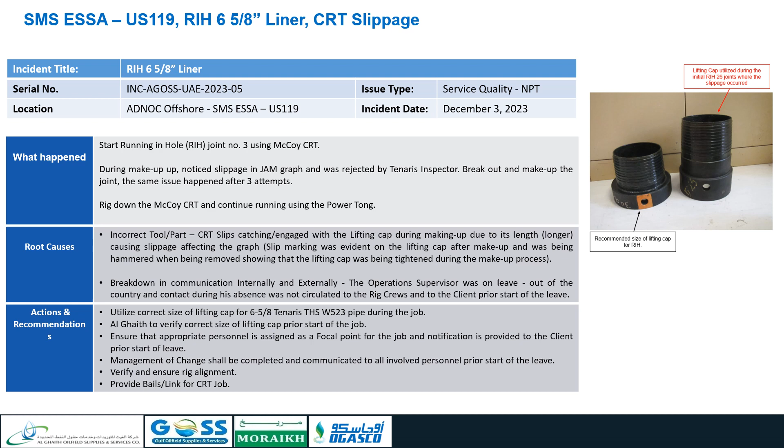prior start of leave. Management of change shall be completed and communicated to all involved personnel prior start of the leave. Verify and ensure rig alignment. Provide bails, link for CRT job.

Incident regarding cementing batch mixer exhaust insulation burned. Happened on November 29, 2023 at 2300 hours, at AD 113 well BB 1783. Incident description. After mixing cement slurry in batch mixer, smoke was observed on the engine area. Team on location stopped the batch mixer and proceeded to extinguish the possible fire.

Initial findings. Exhaust system insulation cover was burned and caused smoke. No signs of fire in the equipment other than smoke in the insulation cover. No flames were observed during the incident. Immediate action was taken by personnel in location to remove the insulation and cool it down to remove the risk of fire. No personnel injuries nor equipment damage.

Equipment is 1 year in operation. Immediate actions taken and recommendations. Stop work was applied. Insulation material specifications to be reevaluated. PM practices to be reviewed with maintenance team.

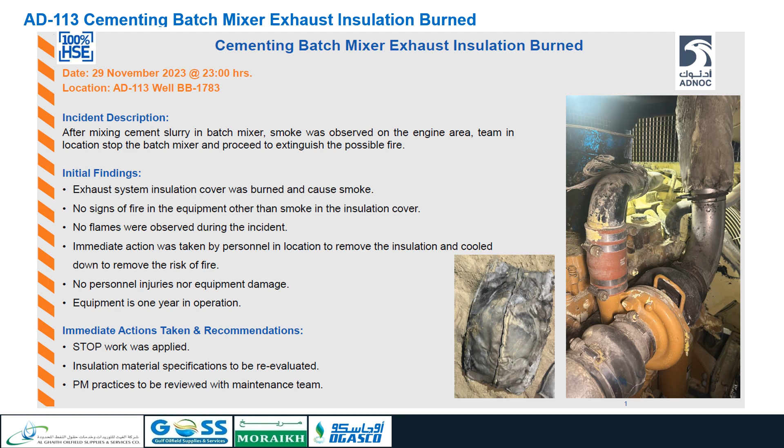Incident regarding injury while pulling belt tong. Happened on November 2023. What happened? While cleaning the dies on the belt tong, a floorman used the air tugger to pick up the belt tong when it got stuck on the iron roughneck track. The belt tong hanger arm bolts sheared and caused the hanger arm to contact the tong operator on the forehead.

Why did it happen? Inadequate job preparation by rig crew. Rig floor was overcrowded, which created poor visibility for the tugger operator. Tugger operator is not certified. Poor hazard identification by the rig crew. Stop work authority, SWA, was not implemented to stop the hazards.

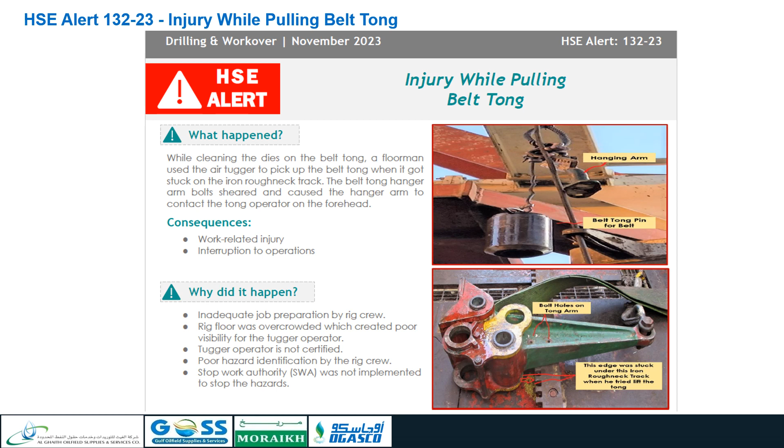What should be done to prevent reoccurrence? Ensure proper job preparation and discuss combined JSA with third party prior starting any work. Rig to limit the access to the rig floor to avoid overcrowding. Only certified and competent employees to operate air tugger. Conduct hazard identification refresher training to rig personnel. Reinforce the SWA among rig crew.

Areas where improvement is needed. Workers must always maintain awareness of the surroundings. Understand line of fire and follow precautions associated with hazardous objects, equipment, substances, and other conditions. Work supervisors must confirm that the site is properly lit and that all required PPE is being worn. Confirm that all hazards are identified and controlled.

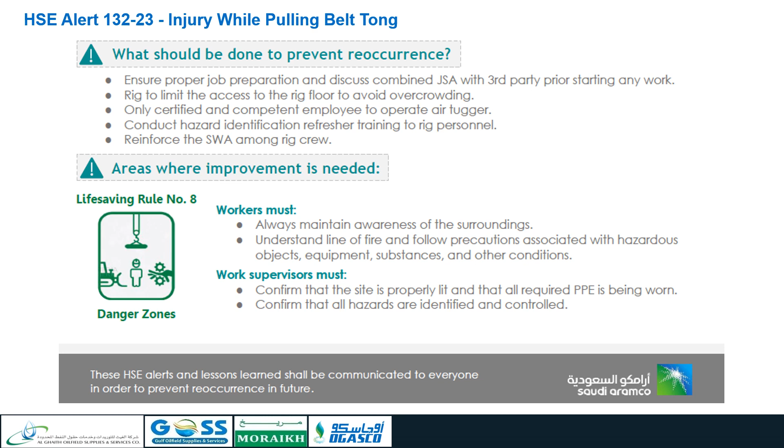Incident regarding struck by casing. Happened on November 2023. What happened? The operation was running in hole with 24 casing. While lowering the joint by crane, the joint swung toward the rotary table and struck IP's leg. Consequences: work-related injury. Interruption to operations.

Why did it happen? Failure to recognize the hazards. Simultaneous operations on rig floor. Stop work authority, SWA, was not exercised. Lack of supervision.

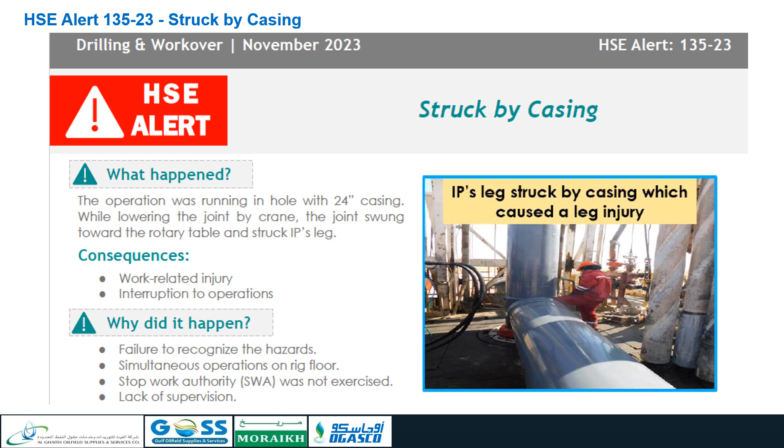What should be done to prevent reoccurrence? Position of crews shall be established and hazards shall be discussed during pre-task JSA/meeting. Avoid performing simultaneous operations on the rig floor. Emphasize SWA among rig crews. Work supervisors shall be present on all critical tasks.

Areas where improvement is needed. Workers must understand lines of fire and follow precautions associated with hazardous objects. Work supervisors must confirm that all hazards are identified and controlled.

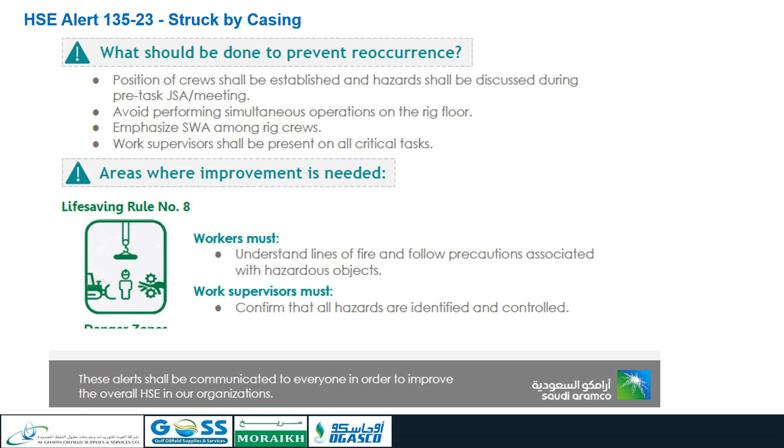Incident regarding finger pinched between pipe spinner and iron roughneck. Happened on November 2023. What happened? During housekeeping on rig floor, first floorman, IP, was moving the iron roughneck to the parking position, while second floorman was holding back the pipe spinner to avoid collision with the iron roughneck. While doing so, the second floorman unintentionally released the pipe spinner, which swung and contacted the iron roughneck and pinched IP's finger. Consequences: work-related injury.

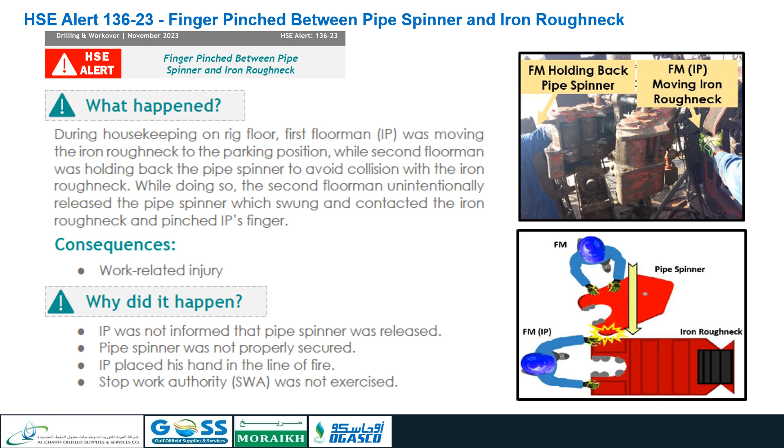Why did it happen? IP was not informed that pipe spinner was released. Pipe spinner was not properly secured. IP placed his hand in the line of fire. Stop work authority, SWA, was not exercised.

What should be done to prevent reoccurrence? Maintain proper communication during all tasks. Properly secure the pipe spinner in a stationary position with its securing sling. Provide safety awareness refresher sessions for line of fire and pinch point hazards. Exercise SWA. Areas where improvement is needed.

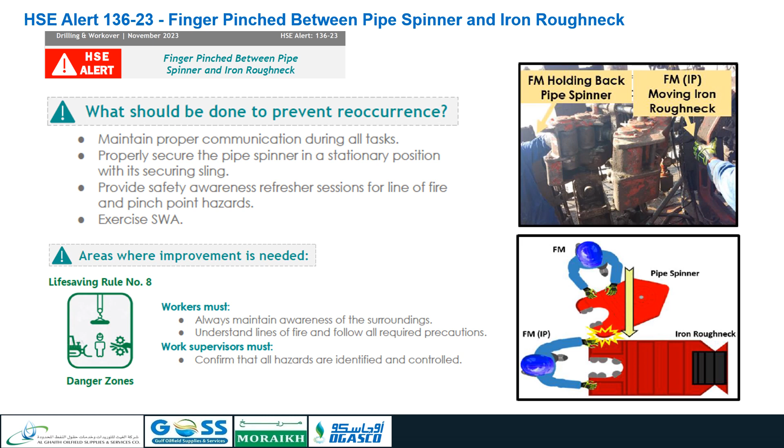Workers must always maintain awareness of the surroundings. Understand lines of fire and follow all required precautions. Work supervisors must confirm that all hazards are identified and controlled.

Incident regarding crew member slid down V door. Happened on November 2023. What happened? Operation was RIH with 2 7/8 tubing and pickup tubing from catwalk using air tugger. Once tubing joint was simultaneously raised while TDS was lowered, TDS contacted upper part of the joint and forced it downward. IP was hit by the joint and slid down V door.

Consequences: work-related injury. Interruption to operations. Why did it happen? Running operation without proper risk assessment. No rope was used on V door to control tubing. IP was standing in line of fire. Inadequate supervision. Stop work authority, SWA, was not implemented.

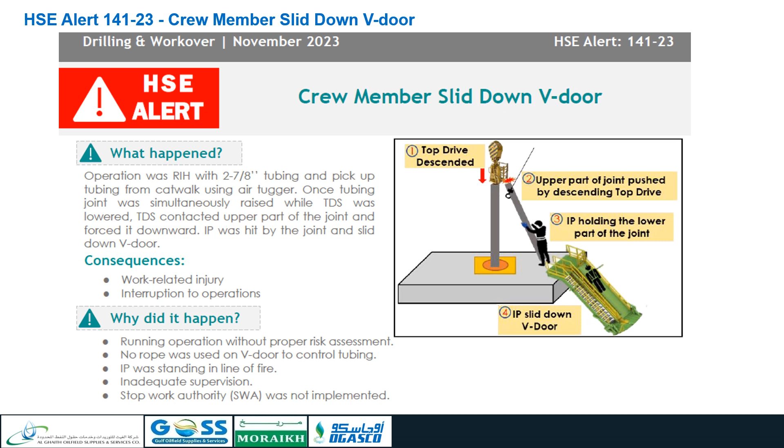What should be done to prevent reoccurrence? Investigation is ongoing. All operations shall be properly assessed. Remind crew of lines of fire and red zone management. Follow precautions associated with hazardous objects. Enforce use of SWA. Areas where improvement is needed.

Workers must always maintain awareness of the surroundings. Work supervisors must confirm that signaling and communication methods are agreed upon and understood by all workers. Confirm that all hazards are identified and controlled.

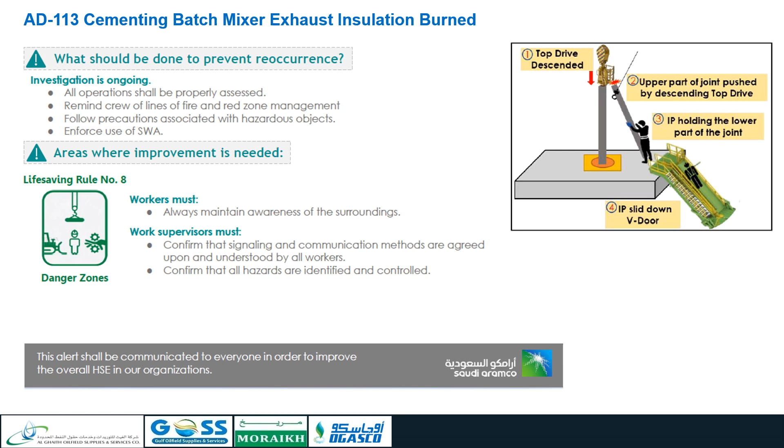Incident regarding damaged PU/LD machine support beam. Happened on November 2023. What happened? The operation was RIH 9 5/8 casing with pickup/laydown, PU/LD, machine. Upon picking up joint number 23 to rig floor, the traveling line of the trough parted. This resulted in the descent of the trough along with the contained joint. The transportation support beam of the trough got damaged at the back side of the PU/LD machine.

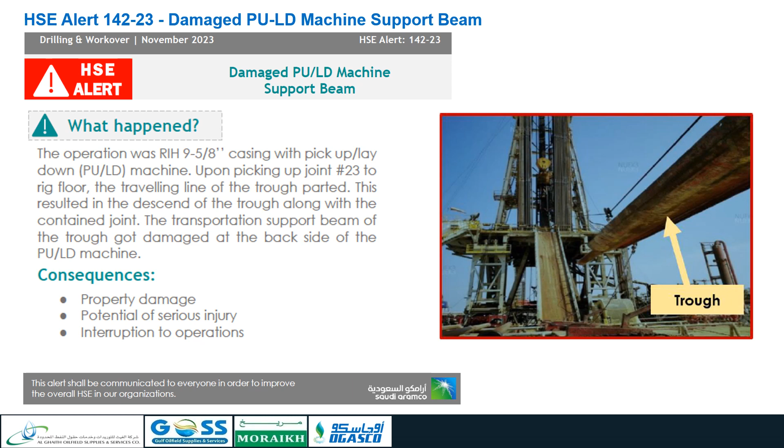Consequences: property damage. Potential of serious injury. Interruption to operations. Why did it happen? Lack of inspection process on PU/LD machines installed lines. Pre-job visual inspection was not conducted. Insufficient maintenance of wire rope sling before and after each job. Poor supervision for not completing the wire rope sling inspection.

What should be done to prevent reoccurrence? All lifting equipment shall be inspected as per lifting equipment matrix and records maintained at the PU/LD machine, prior to use by a competent person and documented in the JSA. Supervisor shall verify the compliance with the safety requirements for inspection and use of the lifting equipment.

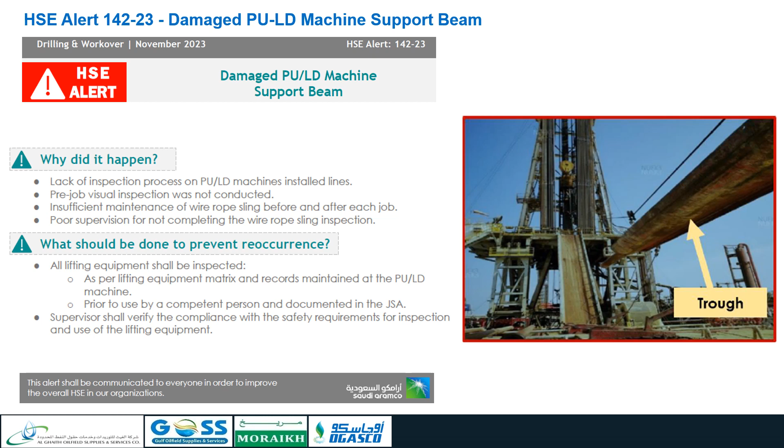Incident regarding drill pipe bent incident. Happened on December 2023. What happened? While RIH and PU 4 inches drill pipes, DP, assistant driller AD, who was covering for the driller at the time, picked up one joint of DP from the mouse hole using the elevator. While slacking off the block to make up the joint, AD lowered the block too fast, causing the TDS to contact the top of DP joint, resulting in bending the joint. Driller was present at rig floor and was busy with paperwork.

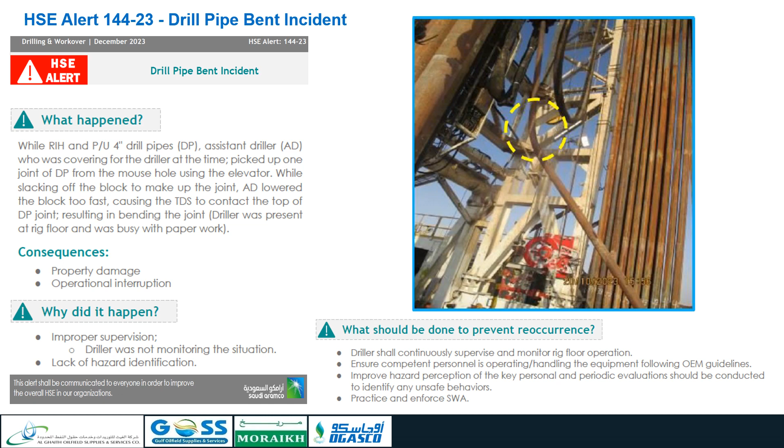Consequences: property damage, operational interruption. Why did it happen? Improper supervision. Driller was not monitoring the situation. Lack of hazard identification. What should be done to prevent reoccurrence? Driller shall continuously supervise and monitor rig floor operation. Ensure competent personnel is operating/handling the equipment following OEM guidelines. Improve hazard perception of the key personnel and periodic evaluations should be conducted to identify any unsafe behaviors. Practice and enforce SWA.

Incident regarding finger pinched between circulation sub and HWDP. Happened on December 2023. What happened? After cementing operation, the crew was instructed to clean the rig floor and prepare for next operation. Driller, IP, decided to assist the crew in repositioning 13 3/8 circulation sub manually. IP's finger was pinched while positioning the sub near the heavyweight drill pipes, HWDP, at setback area.

Consequences: work-related injury. Operation interruption. Why did it happen? Poor hazard identification. Improper hand placement. Fail to utilize hand-free tool or another alternative. What should be done to prevent reoccurrence? Promote hazard identification awareness for all rig crew. Task shall be planned and assessed prior to execution. Emphasize on hand-free tool. Areas where improvement is needed.

Workers must always maintain awareness of the surroundings. Stop work immediately if conditions change or a worker is in an unsafe location, and notify the supervisor. Work supervisors must confirm that the site is properly lit and that all required PPE is being worn. Confirm that all hazards are identified and controlled.

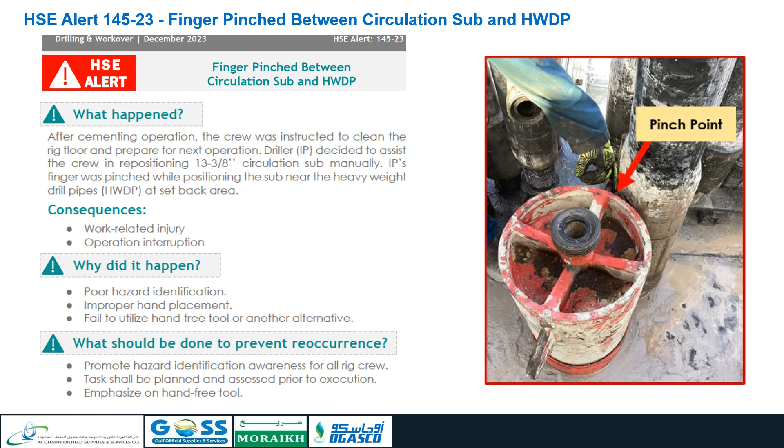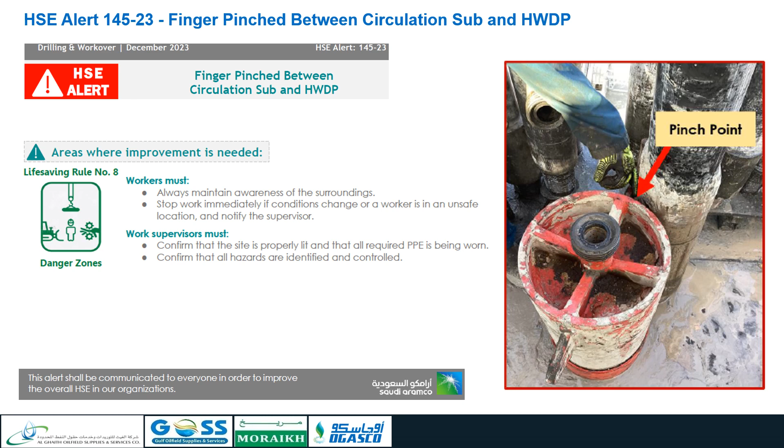Incident regarding uncontrolled TDS descent. Happened on December 2023. What happened? While laying down tubing, the elevator was latched onto the string in the stump. Driller was marking off the previous joint from the pipe tally and did not set the parking brake. TDS began an uncontrolled descent and landed on the rotary table, which damaged the third-party elevator, the joint in the rotary, and the elevator link securing latch. Consequences: property damage, operational impact, potential to work-related serious injury.

Why did it happen? The park brake of TDS was not engaged while leaving for checking joints. Multiple tasks were carried out by the driller at the same time. What should be done to prevent reoccurrence? Driller must not leave the TDS without setting the park brake. Ask for support from rig crew for multiple tasks. Assistant driller or floorman should support the driller for other tasks to avoid distraction. Conduct refresher training and awareness sessions on the brake system.

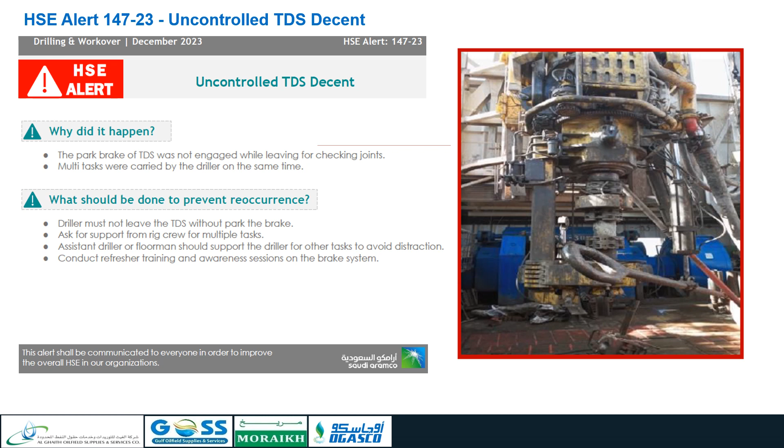When you give safety little time, it will give you lifetime.